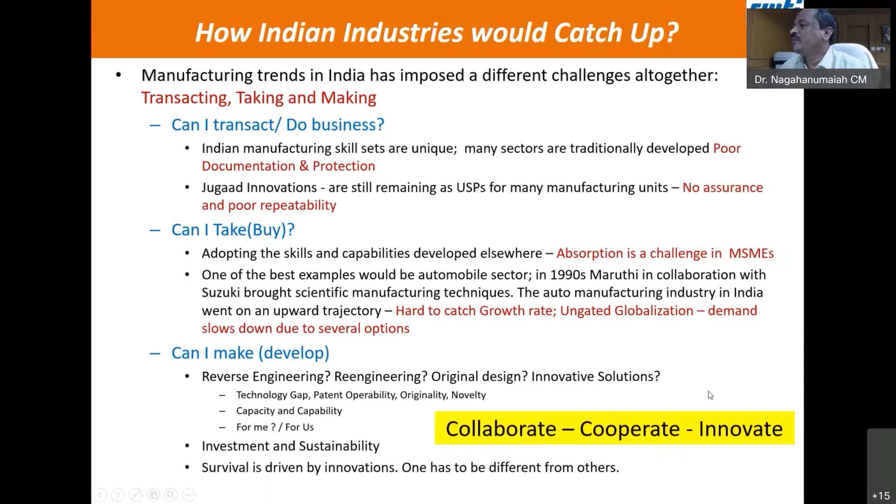So in order to survive, one has to be different from others. I think that is where innovation matters. My talk is primarily to convey my thoughts on how one could innovate, through collaboration and cooperation. We all know this model is very popular in business development - how innovation models are coming and each technology will be there - but our target is, can we transform India from the situation of 'made for India' to technology or products 'originated in India'? I think that is what brings Atmanirbhar, or sustainable India, in technology terms.

But while doing this, I think that is where we in the Indian system look at these 4 P's differently - not in an inclusive way. I think that is where we miss out. We need to look at the innovation process in an inclusive way that addresses all these 4 points: product, process, people, and production.

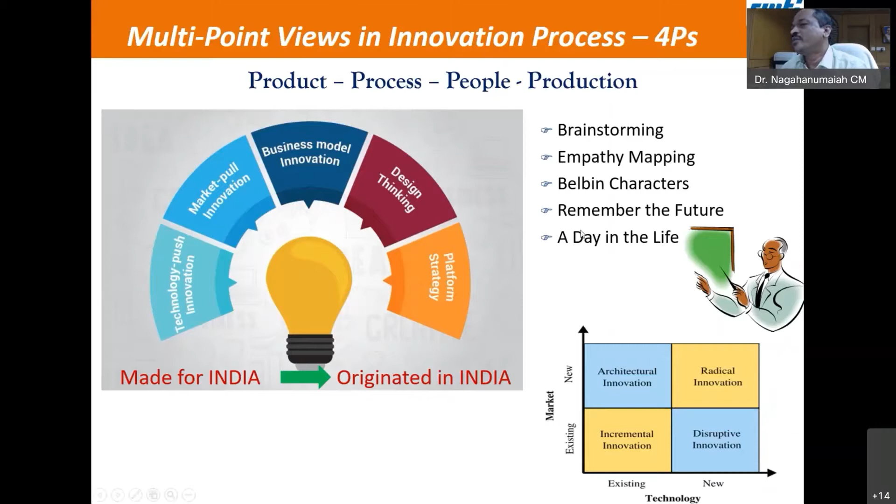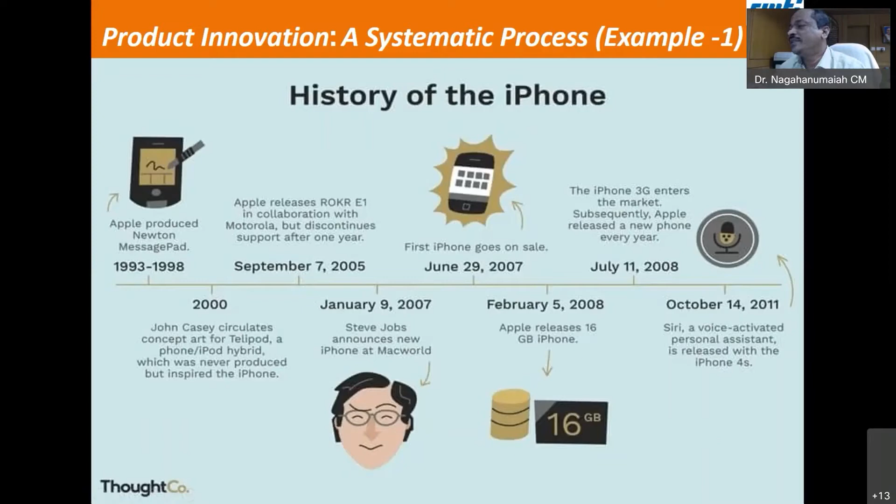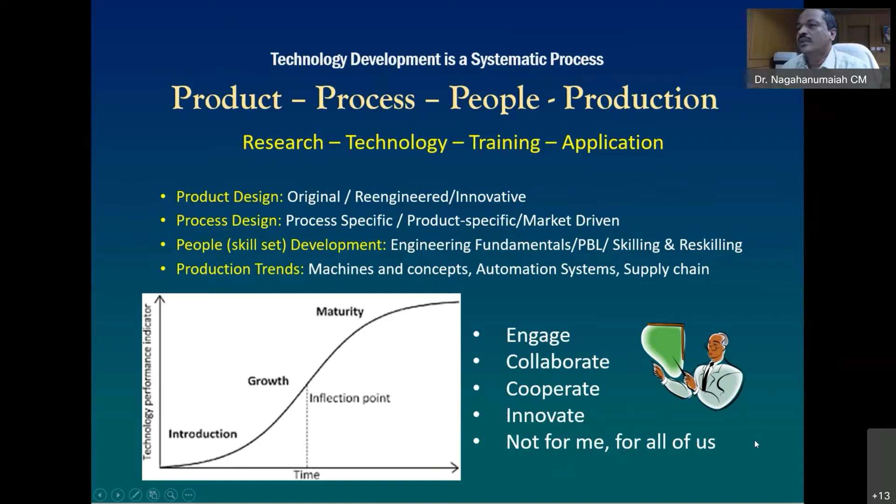Of course, countries like us should look at the technology or the innovation, not for me, it is for us. That is where basically inclusive innovation matters.

If you look at inclusive innovation for engineering multi-scale and multifunctional parts, that is the characteristic of the current innovation process, because products are becoming multifunctional and intelligent, and one has to operate at multiple scales. So these are the 3 research areas one has to look into apart from the design: the engineering of products, manufacturing processes, manufacturing equipment and machines, and manufacturing systems and factories.

So in order to do this effectively, in addition to the design aspect, inclusive innovation primarily advocates the involvement of the complete stakeholders. In simple terms, this I took from the public media: inclusive innovation is the means by which new goods and services are developed for and by those who have been excluded from the development mainstream.

So the basic idea is that innovation doesn't happen with only stakeholders, it is also the people who are otherwise not in the mainstream of the innovation system. If you can, details can be referred to by this. This is a good book, a good reference material.

As an objective, inclusive innovation seeks to provide sustainable solutions to those who would otherwise remain excluded from access to offers as a result of their social, economical or environmental context. As an activity and a business model, it reconciles the goals of commercial viability and sustainable societal development.

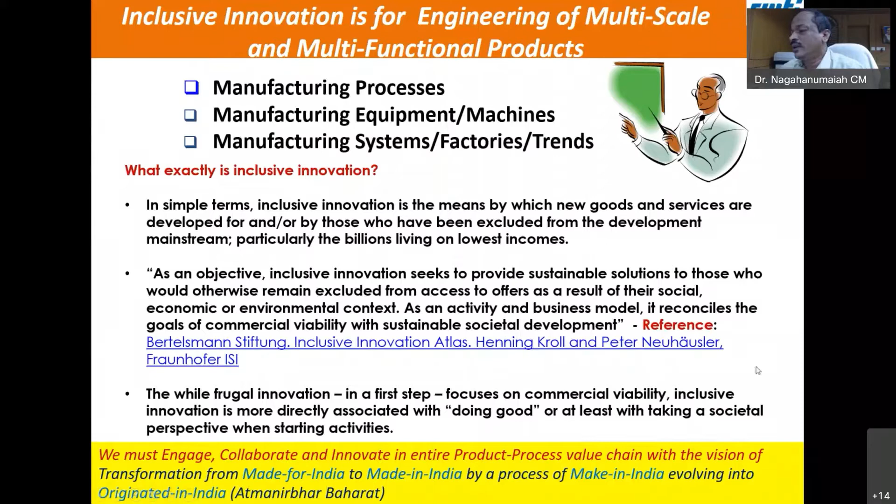I think this is where our target and our vision of our Honorable Prime Minister lies. So then, if you look at it, original product process innovations, I think we have not done good.

The reasons, of course, it is debatable. I will not get into the details, but as for me, I think these are some of the key elements that put us at the bottom in original product or process innovation.

One is, we always look at science and engineering and study as two isolated pillars, because after plus two, if someone's IQ is good, he clears JEE or whatever the common engineering entrance test and gets into engineering. Whoever could not, does science. And many times the one who joined science is already demotivated because of so many reasons.

Then in school education, we always know how to score 98 rather than 95. And there is no active and participatory learning, because our teaching is always curriculum driven. In so many cases, I'm not blaming anybody, but in many cases it's true.

The manufacturing is taught by a faculty who had never operated a lathe. I think there is no minimum requirement to become an engineering faculty. Today I'm a student, tomorrow I'm the faculty of an engineering school.

Then there's social obligation, no importance given to our own passion. So I become an engineer because my father wanted, or I become a doctor because my mother wanted. We rather think more of the comfort of the next generation, because how I eat, how I feed my son, how my son feeds my grandson. That is how we look at it.

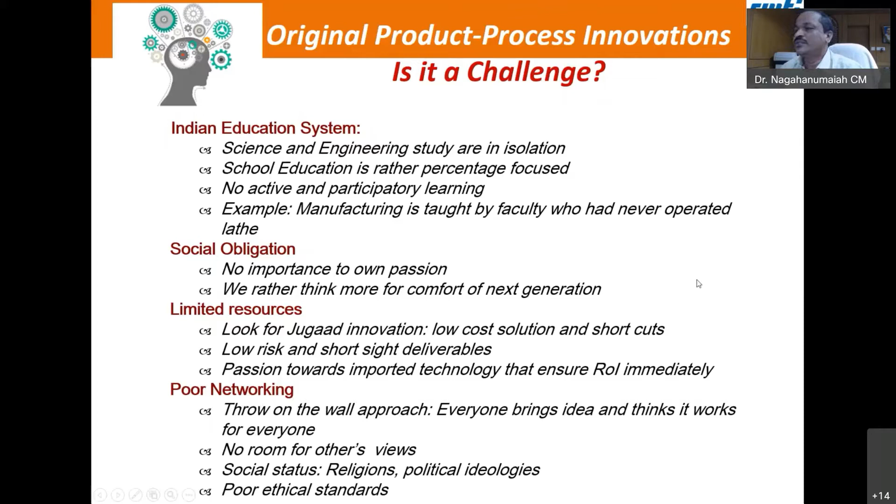Of course, limited resources lead to jugaad innovation. It is not wrong, but at the same time, it cannot be repeatable. Low risk and short sighted deliverables because of the limitation. And of course, this is very debatable, poor networking, because we all believe everything we say works, and there are no rooms for others' views and also other social challenges and issues.

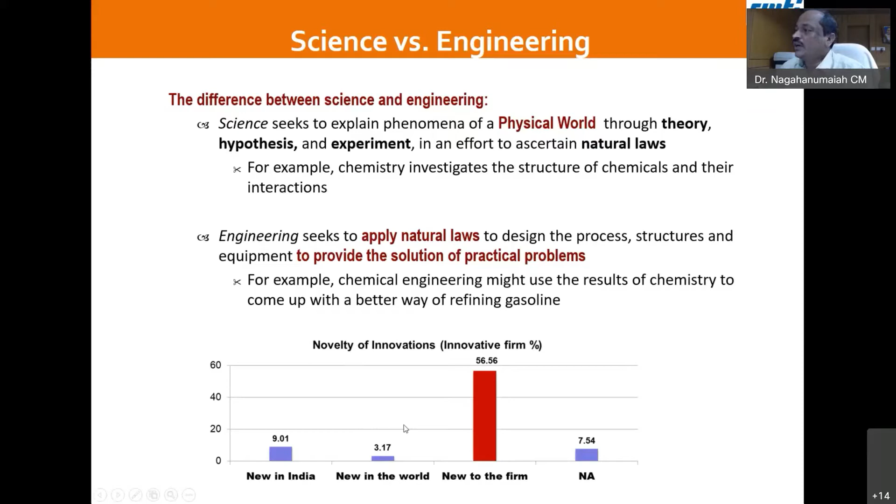If you look at the survey conducted in 2016 on industrial innovation in India, the majority is new to the firm. It covers 9,001 industries. It was done by the Ministry of Commerce, and the report is published by them. So it's about 60% new to the current firm, new to India is 9%, and new to the world is less than 3 to 5%. This is what the reality of innovation is, but innovation need not make an impact globally.

Then what are the roadmaps, the drivers? The roadmap is, I think there is no other option. One has to believe there are 4 stages. One has to do research, then take this research further. Many of them will not even reach this stage, to develop it as a technology.

That means process, capital, everything in the industrial attributes. Then you absorb, meaning you train, teach, and prepare, then you deploy, and then you realize the cost benefit, whatever the outcome delivery is. The drivers are, yes, I think this is where we Indians are now.

For some time, we are not given much importance. We always believe something made outside is good. It is always well known that you know how to do things with your hands.

You will be skillful. You are a more free and independent individual. You can depend on yourself and your community. You are well prepared. You can stand up to technical crashes and resolve them. I think COVID was one example. Many people had only a single supply chain, so many had to close their operations because of that kind of poor preparation.

You are more rooted in the real world. You are more confident. You realize that you don't need many of the luxuries. Now nobody looks at luxury, everybody looks at frugal engineering.

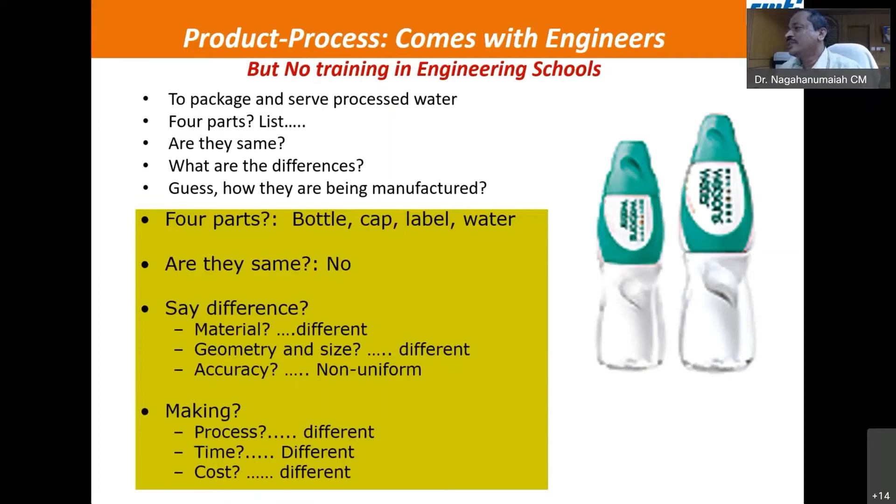So the situation is like this. You ask about the least count of the vernier caliper, and students will always say, I'm not blaming anybody, that the value of 1 MSD minus value of 1 ESD. But if you use the vernier caliper with a least count of plus or minus 0.02, and your inspector has written diameter 19.998 against the base drawing dimension of 20 mm, I think many students are not able to identify whether it is correct or not.

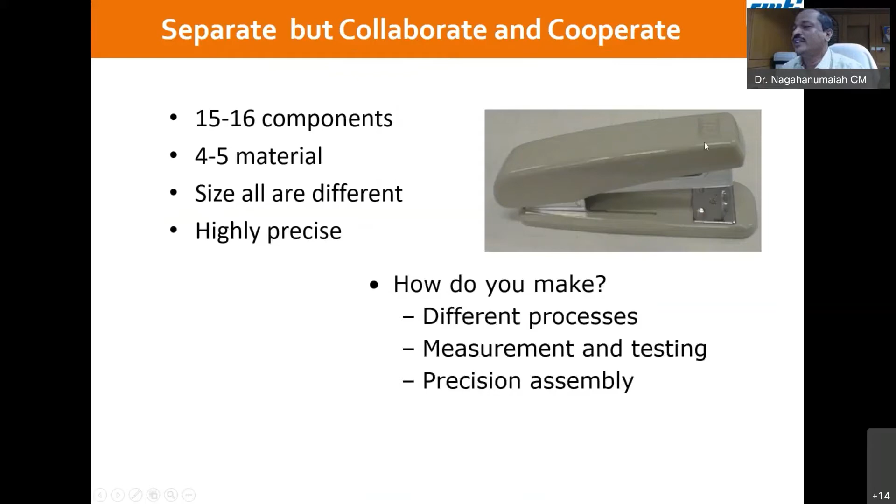I think that is the kind of challenge we have. Even look at us, how many of us realized, because I use a stapler every day, but even I did not realize when I was in engineering school, that this stapler has about 15 to 16 components of 4 to 5 materials. And even the dimension requirements to design this are in the order of precision, like few microns.

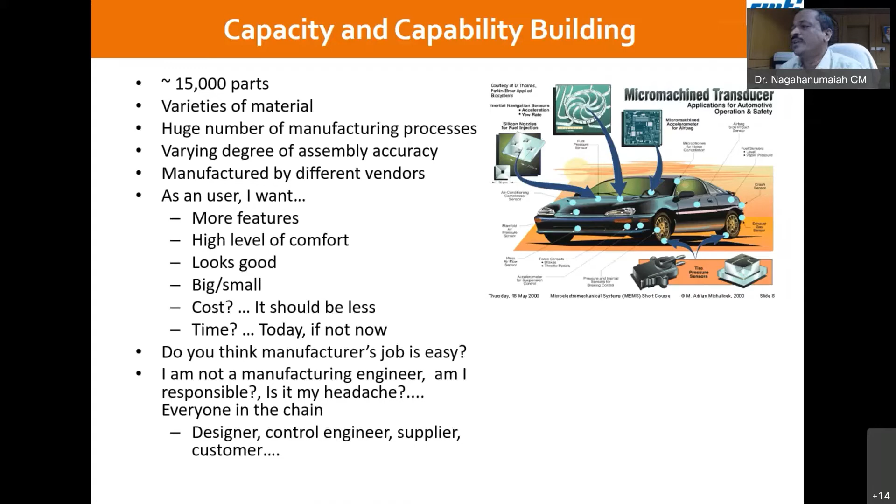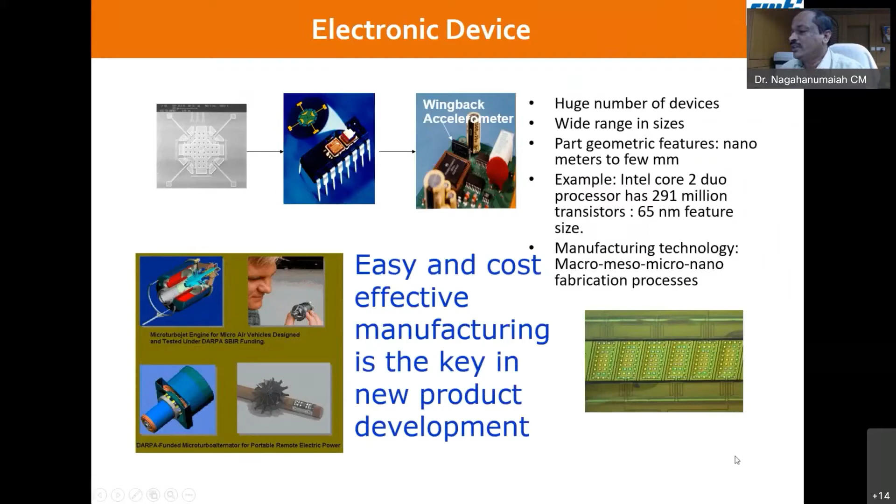Then look at the miniaturization that happened. This is like a micro turbine, turbojet engine, which could be held by hand. That's a kind of miniaturization. On the right side, this is a fluidic chip which could be used in biomedical analysis. Always for manufacturing, easy and cost-effective manufacturing is the key, no matter whether you make a water bottle or biomedical devices.

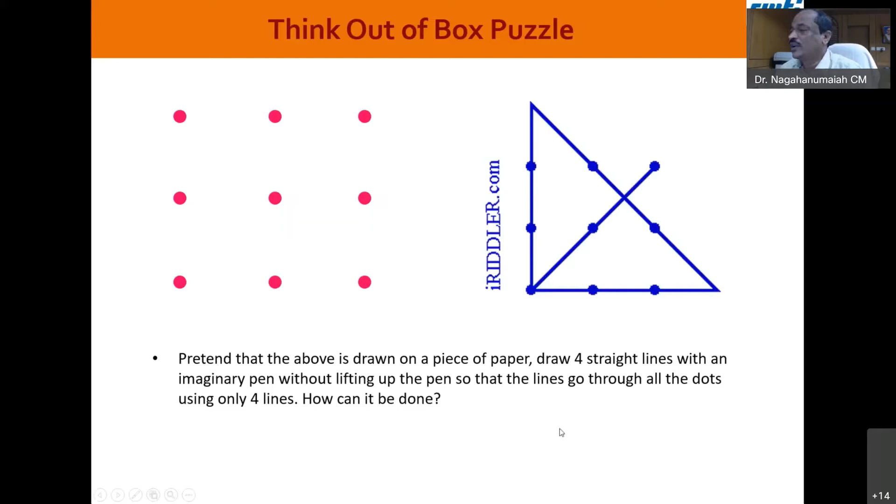Another issue is that we have 2 or 3 different verticals, you can say, where producers and employers have different perceptions regarding learning exercises. From academia or the school promoters' side, they always look at practical based learning as not what we have been doing for the last 20 years. And how can you do active learning in mathematics?

There is another kind of view, but researchers say, okay, that just won't work in engineering, but yes, we can't afford that attitude. On the other aspect, the industry aspect is retention, motivation, engagement, and learning. I think this may be the reason for this bad condition, which is sad.

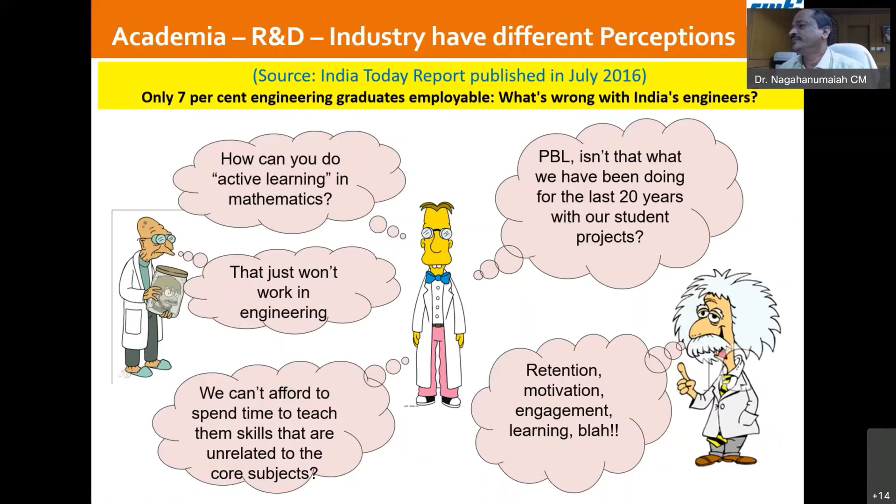In India Today, a report published in 2016 says only 7% of engineering graduates are employable. I think the question to be answered is, what is wrong with our Indian engineers?

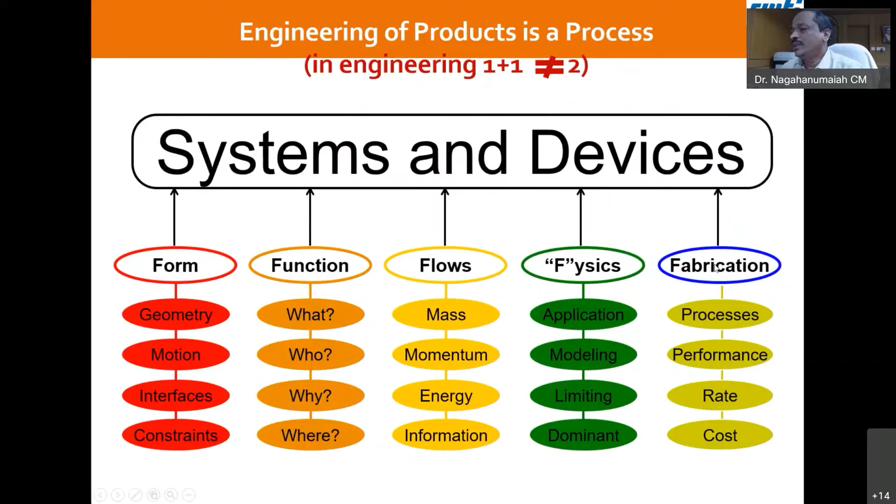Again, I think many of us have failed to recognize that in engineering, 1 + 1 will never be 2. It is always 2 plus dot something, or 2 minus dot something. That is because of these 5 F's: form, function, flow, physics, and fabrication. If an engineering student can recognize this importance, this is another example of how fundamentals are important.

Look at any manufacturing process, I have not seen any manufacturing process which doesn't fall under these 4 categories: either we remove material, or we shape the material with phase change or without phase change, or we add material through additive deposition, or we assemble atoms through self-assembly and self-organization, biomanufacturing and so on. There may be some variants or hybrids, but broadly, whatever manufacturing process we have today, no matter what you make, could be characterized this way. This is a clear indication that students have to be fundamentally clear.

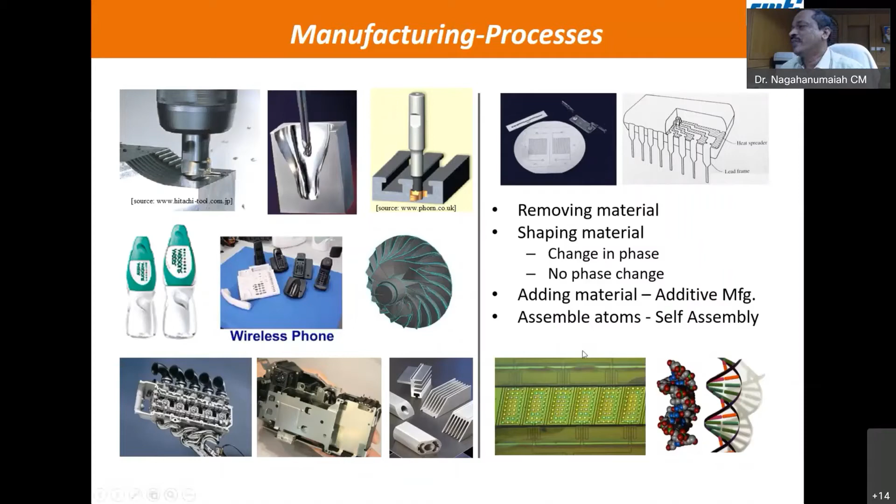Bringing real projects into a school is always difficult because, except for our IITs and IISc system, faculties have to teach courses designed by a curriculum and complete the syllabus as per that curriculum. A survey says students' attention span is only 10 to 15 minutes in a class of 45 to 60 minutes.

I think that is where the challenge lies for the faculty. If we can bring the stories of real problems into the classroom, and any faculty can increase that 10-15 minutes to 35 minutes, I think that is the best faculty, no matter what technique he uses. I believe: I hear and I forget, I see and I remember, I do and I understand.

I think in engineering schools these days, many institutions have compromised on practical-based learning. We need to bring those things back into the engineering curriculum.

Second is technological innovation. I've taken food research as an example because it's easy to correlate. These are the driving forces: food should be healthy and nutritious, better efficiency in food production, environmental and political impact, and the reality versus perception gap. There are a few more details.

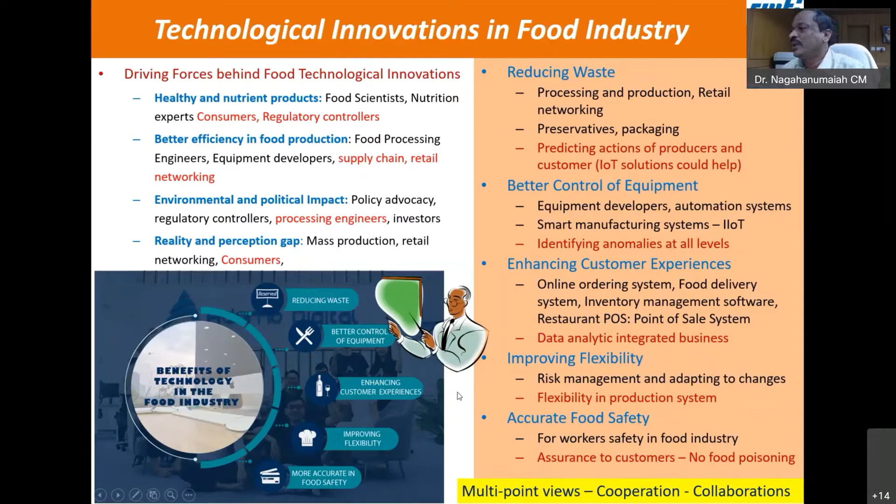This is one example where I was involved - CMTI. When I was doing micro-nanoscale EDM, I set two objectives. Micro EDM is a slow process - is there any way we can increase the productivity?

Second, since micro EDM is used for ultra-precision or micro-nano system devices, use of lubricant - the dielectric fluid - is always an issue. So the question was whether I could make micro EDM a clean process. Having identified this, we identified all these challenges.

As a researcher, along with my colleagues and students, we studied some of this and even tried to build a prototype. Building the prototype itself revealed different challenges when looking at micro-nanoscale EDM machine development.

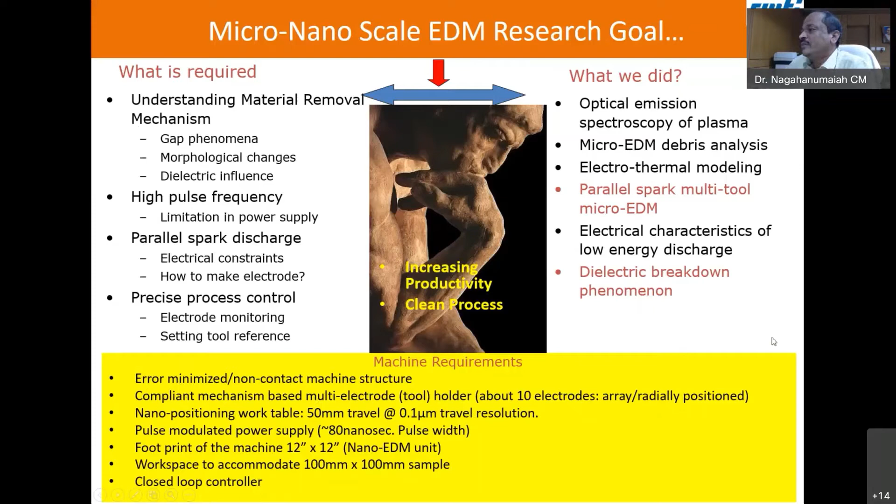I think that is where inclusion is required - people have to look at it as a total solution, addressing all these 4P challenges. This is my own slide.

I'm also looking for any suggestions here - this is just a slide I came up with about a month back. Reinventing research, innovation, entrepreneurship, and growth for customized product manufacturing. Here I took interventions - development of Indian technologies, technologies and products for optimized outcome-based innovation by addressing the 4P challenge.

Here I propose a DISC-based approach. This means: Data to design - that should address mass customization, localization, novelty, and frugal design.

Then Innovation to inclusion - that is connect and commit, inquire and investigate, design and development, implement and iterate. Then Cooperate to collaborate - that is all-in-one, teach, train, skill, rejuvenate, because we Indians easily get frustrated. And then you normalize - particularly with respect to IPR - it's not for me, it is for us.

Then Scalability to sustainability - that includes capital, machines, automation, knowledge harvesting, productivity enhancement, modularity, and flexibility. I think that is where I propose this kind of DISC approach.

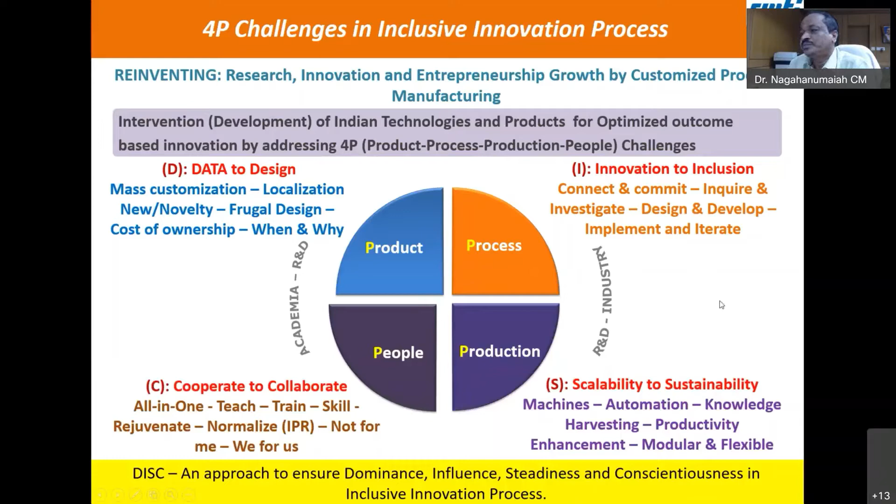So this approach aims to ensure dominance, influence, steadiness, and conscientiousness in the inclusive innovation process. That would bring about a situation like this.

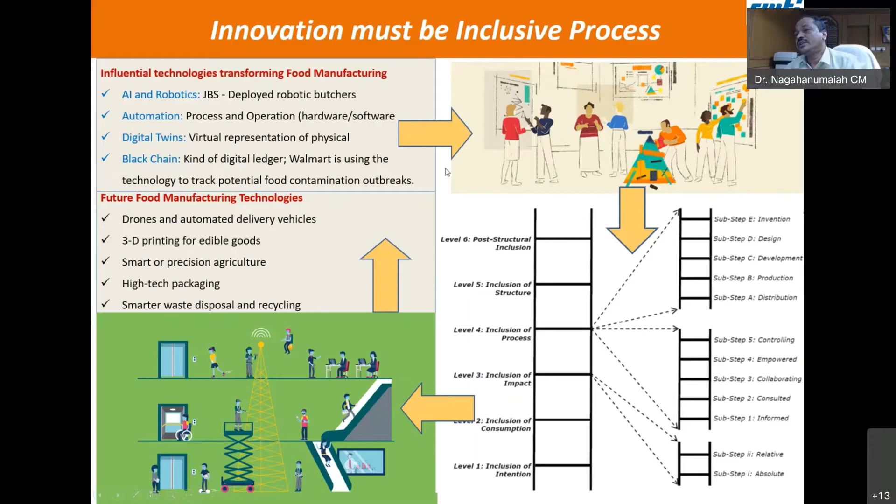Of course, this is already textbook material - there are different levels of inclusion: inclusion of intention, inclusion of consumption, inclusion of impact, up to post-structural inclusions - to create this kind of environment in the innovation system to realize challenges like technologies for transformation. I think this now becomes a tool or means to realize technological self-reliance, no matter whether it is in India or elsewhere.

So having this background, this is something I thought I'd share. Now we try to do this, even at CMTI we are also trying to bring in this culture. CMTI primarily focuses on manufacturing process development, equipment development, and systems for factories related to manufacturing.

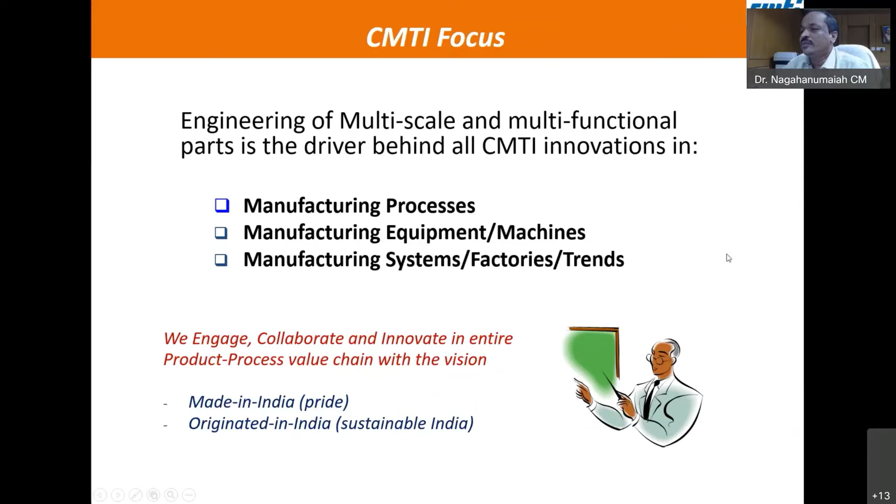Whatever we do at CMTI is at least new to India, so Made in India is our kind of pride. Of course, I can't say CMTI has developed technology new to the world, but whatever we have done is new to India. Currently we work to address four verticals: research, develop technology and machines, train manpower, and deploy into industrial applications.

In our chosen areas related to manufacturing: ultra precision machine tools, where we design machines and develop process technology capable of creating features of a few microns. Then special purpose machines, where for any process we build a machine. These range from tabletop to larger machines. The largest machine CMTI built has about a 12.8 meter footprint.

Then sensors and controls, since these are essential components of the machine tool. Textile machinery, we are into rapier looms. We already developed a 450 rapier loom, and now we are developing a 550 rapier loom. This falls under the special purpose category.

Our next vertical is aerospace, because sitting in Bangalore, which is an aerospace hub, we work with all the aerospace giants. Particularly, our USP is design and development of test rigs and developing process protocols. We design test rigs as required for testing of LRUs, and now we've also started on pumps, aircraft, airworthy pumps for various applications.

Then micro nano manufacturing and precision metrology is another vertical where we offer a lot of services to industry. My current manufacturing capability can produce features as small as about 8 nanometers, which I think is a unique manufacturing facility, especially over metals. Then smart manufacturing and Industry 4.0, we have another center primarily focused on smart machines and intelligent manufacturing processes.

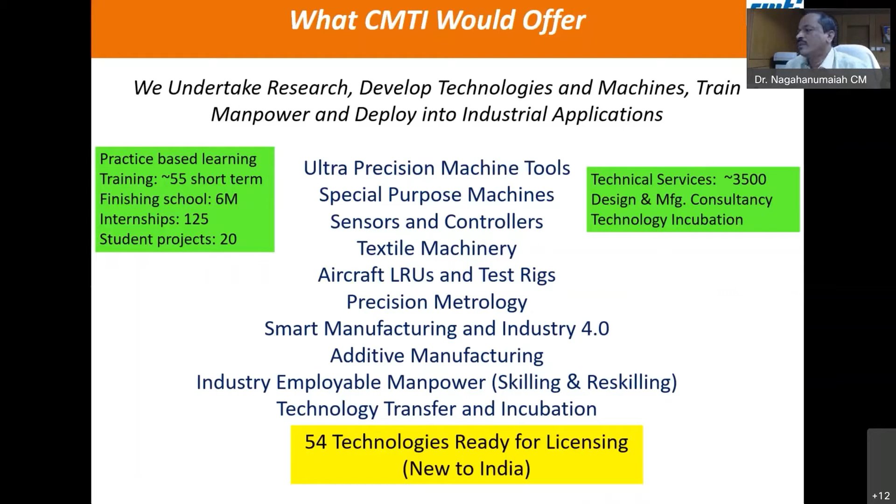Then we offer services to industry in all our areas, with about 3,500 customers. We also offer design and manufacturing consultancy, and technology incubation. For this, right now we have 54 technologies which are new to India today. All these 54 technologies are CMTI technology and are still not commercially manufactured in India.

Unlike other institutes, here we call our units centers, meaning they are all delivery-based focus centers. We restructured recently, about 3 years back. Each center has a design engineer, manufacturing engineer, materials engineer, controls engineer, and electronics engineer. That's how we structured this, with each group having a different focus.

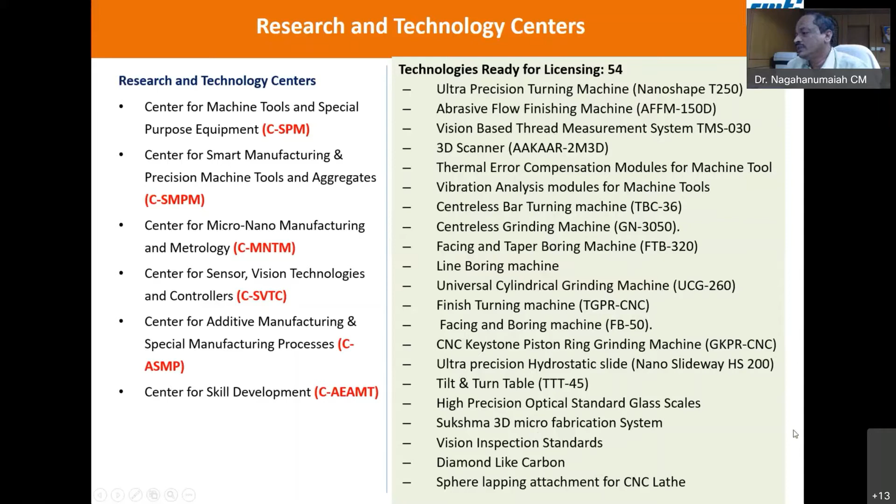So these are a sample list out of the 54 technologies. These are all machines which we developed and are ready for licensing. These are the services we offer related to machine tools and aggregates, measurement and calibration. As far as dimension metrology is concerned, CMTI is number one in India.

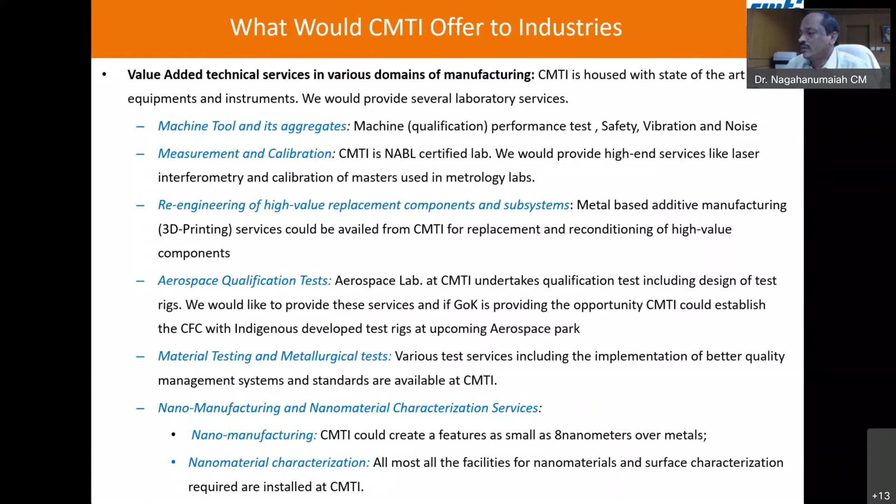Then re-engineering of high value replacement components, aerospace qualification testing, material testing and metallurgy, and nano manufacturing as I mentioned, where 8 nanometers is the smallest feature size we can make. And for material characterization, I think we have all the advanced tools: TEM, ellipsometry, Raman spectra, a range of microscopes, and nano indenters.

When we build a machine, that's another aspect in CMTI. We won't just buy subsystems and integrate them, because building advanced machines that way is always risky due to limited supplies. So what we look at is, when we develop a technology or machine, we also develop the aggregates. That means a company licensing from CMTI doesn't need to worry about someone stopping the supply, because the supply chain is also ensured - you can either make it yourself or build an ancillary to supply it.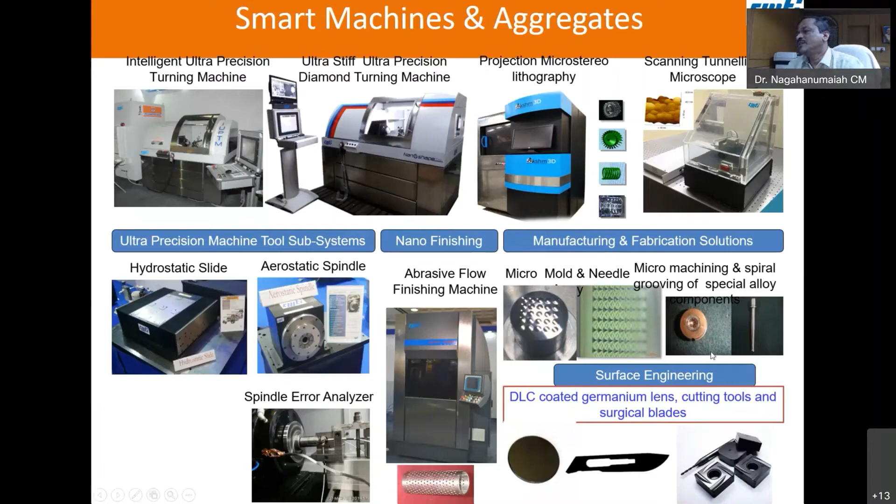Similarly, these are all SPM category - big machines we supplied, including the parallel kinematic machine we developed, and several subsystems like inspection gauging systems. And here it is, a test rig for pumps.

Look at this vertical planetary mixer - we already supplied 22 machines to various strategic sector agencies in India. This is for mixing solid propellant. We have supplied up to 4.5 ton, to be precise. Now we are building 2 machines of 10 ton capacity - that is global standard. We are building these 2 machines for ISRO.

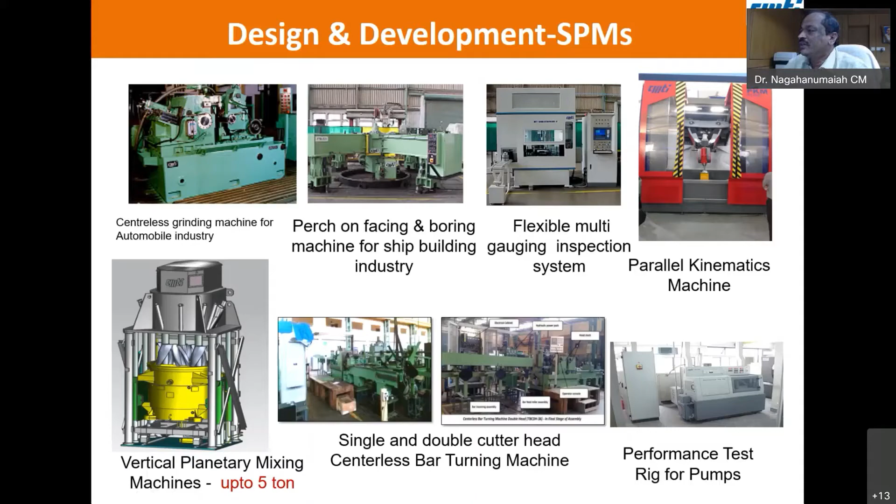This picture shows a range of machines, all developed in one financial year, just in the SPM category. In 2020-21, all these machines were supplied. In CMTI, in one year we build about 10 to 12 machines that we deliver.

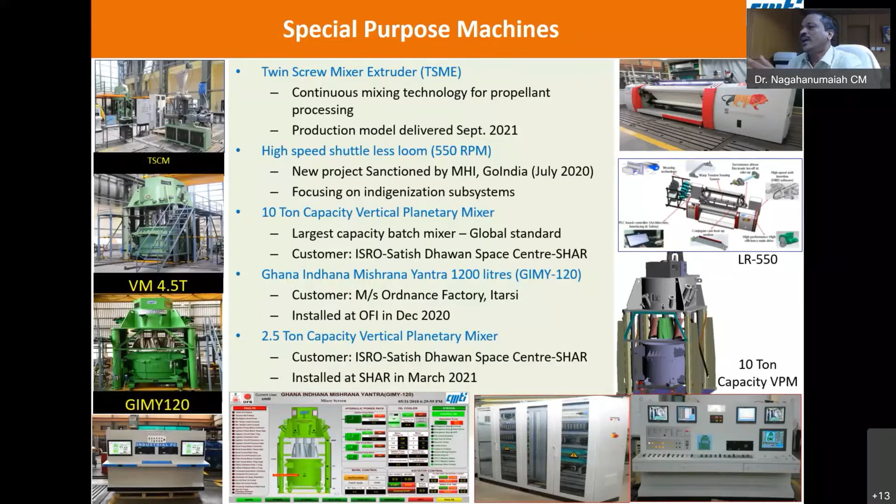We had 3,500 customers for whom we were offering services, apart from our own R&D technology development - these are longer time projects.

We also have the Nano Manufacturing Technology Center, a dedicated center with an underground lab, 13 feet down, focused on all these areas.

You can look at these labs - we have a clean room lab, class 100 to 10,000, with 16 clean room labs in total.

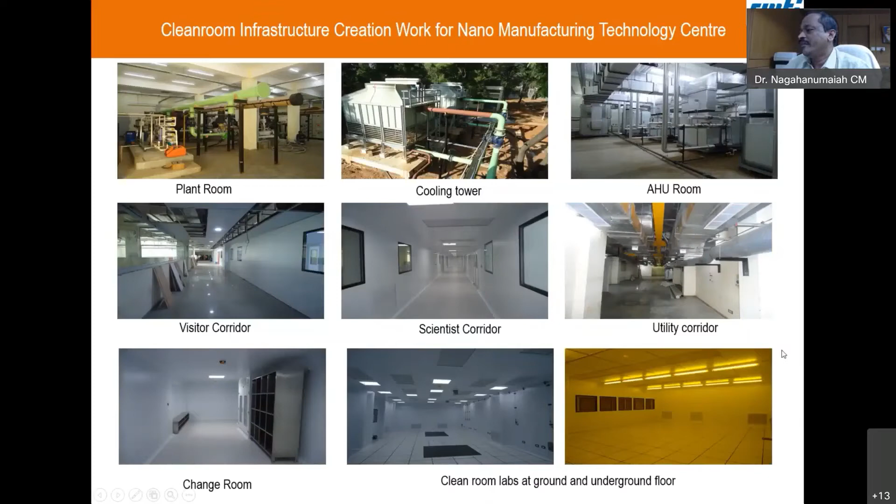And you can look at the underground metrology lab, where we do calibration of master gauges. These are the line inspection metrology labs. So from production, you can bring a sample from industry, and we give the measurement service.

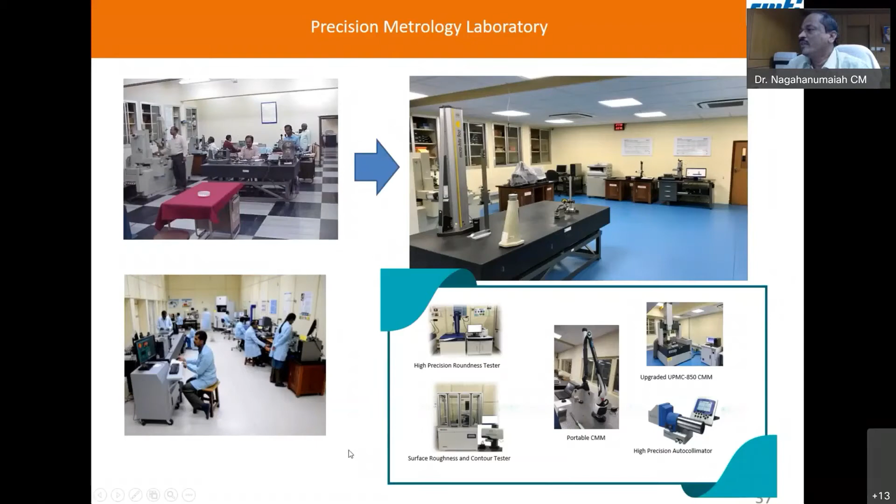This underground lab was established in the 90s, about 6 feet down, and we have a full range of tools. So as far as dimension metrology is concerned, I think we are maybe number one in South Asia.

After that, our technology is now given to Ace Designers, who is a well-known CNC machine manufacturer in India. And look at all these subsystems that we have developed as well.

This is a finished kind of component which can produce optical surfaces with surface finish RA value of 2 nanometers and form accuracy of 0.2 micron. These are other specifications, meaning this machine is not just assembled, it is built from first principles.

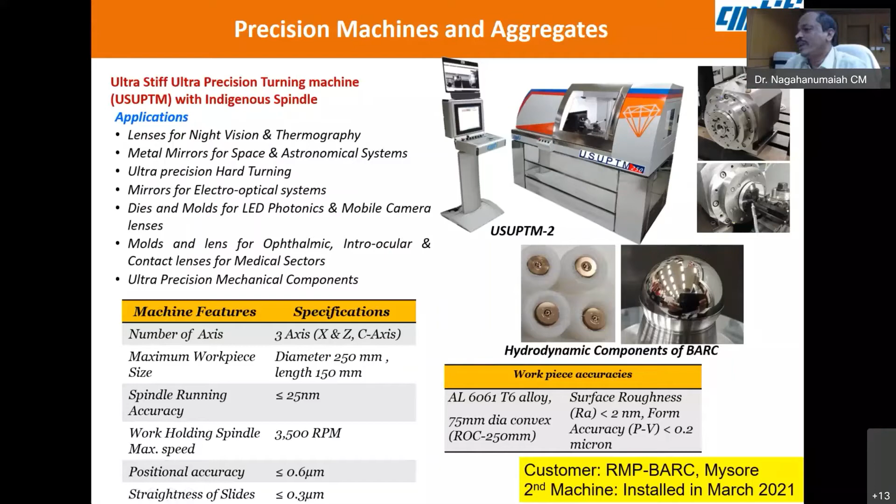That means even the testing itself - the testing of this machine - has a separate protocol which we developed ourselves. And for such developments, of course, we get recognition.

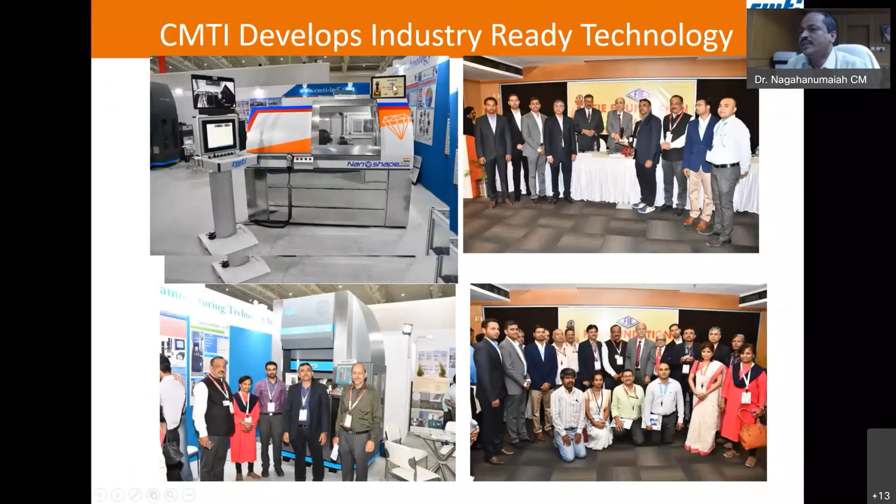At the last IMTEX, we got the industry-ready technology award, the FIE award, which has been awarded for the last 40 years. Look at this - even for other customers like Amrita Institution, we have developed a table, an air bearing rotary stage for some other instruments. That means CMTI can also build aggregates alone for customized requirements.

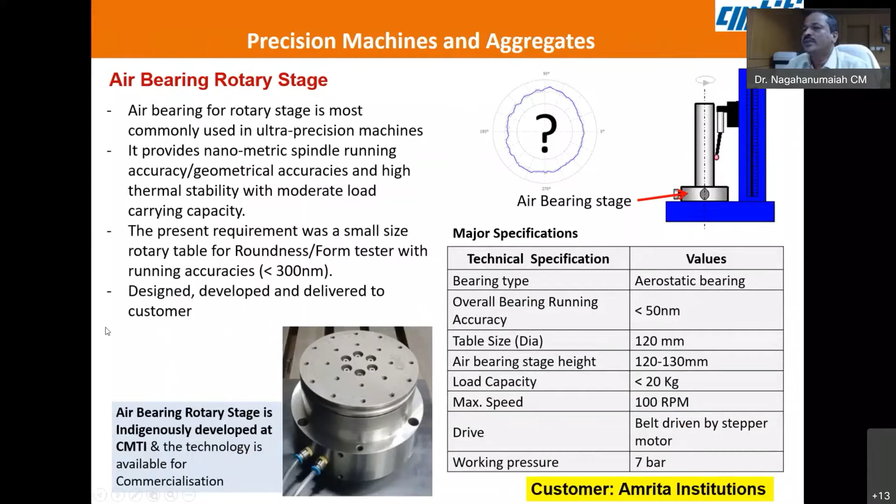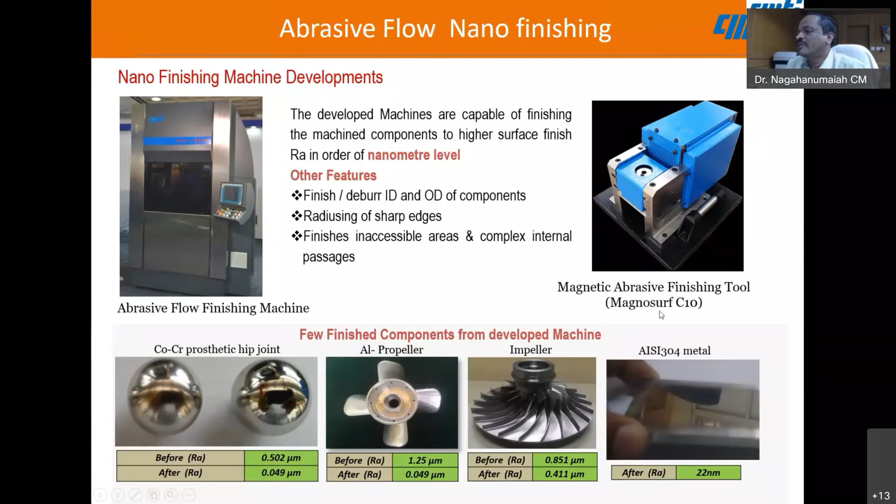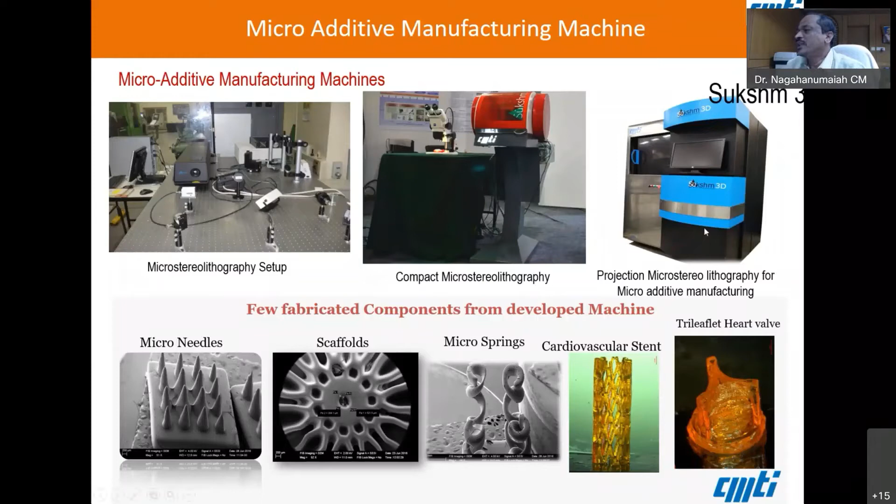If you import this machine from a foreign supplier, it would cost you 1.2 crore, but our machine's academia price is 32 lakhs, and industry price is 37 lakhs.

So then, Industry 4.0 - yes, we are into Industry 4.0. It's just to make aware, Industry 4.0 is nothing new. It is not even a technology. It is only a concept.

The idea is to understand what you are doing based on the data collected from the resource, digitize it and share it to the respective analytics, who do the analytics and come up with predictions or a plan for action. Then take it back to the resources and automate either decision making or the manufacturing system, such that your productivity enhances, breakdown reduces, rejection reduces, so that one can become competitive in the market - that is, you become innovative, responsive, cost effective. That is how I look at it.

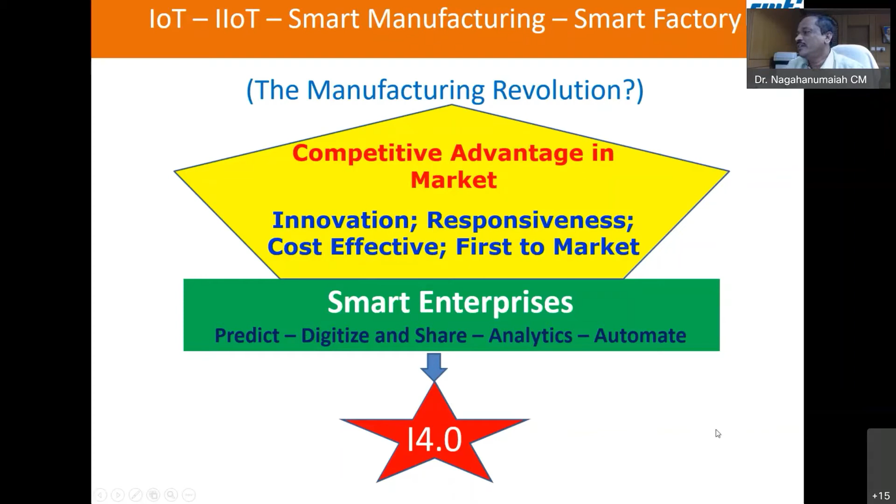Otherwise, Industry 4.0 was already there in industry, but it all depended on so-called Banerjee or Mukherjee in the company. I think that dependency has gone because of technology evolutions, and of course technology happened in the electronics industry, which also facilitates data sharing across the community - that is distributed manufacturing.

We also build multifunctional smart machines in all respects. That is our diamond turning machine, which already has 8 sensor modules and even self-compensation algorithms, ANN based algorithms built into the system. Then there's process intelligence, which I think is where not much work is done, and academic institutions also get into this.

Because many solution providers today, even global service providers, are not there - the reason is smart manufacturing or Industry 4.0 could be implemented from cake manufacturing to flight manufacturing, but it needs to be customized. You need developed, customized, mission-specific, product-specific technology.

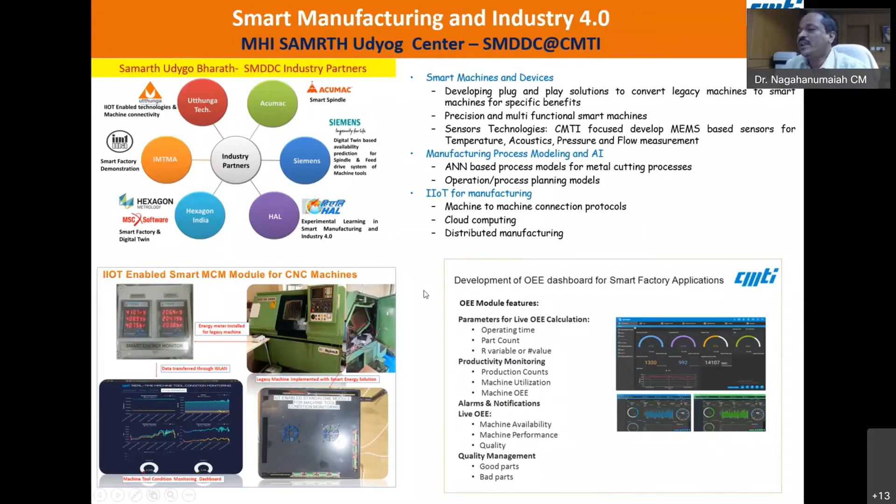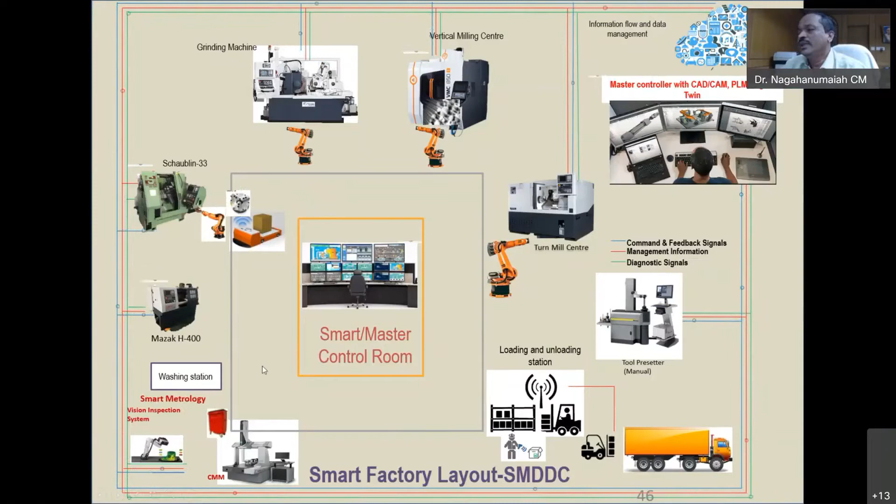This is the controller room, and this is the design room. The first floor is a design house. At the bottom, we have a control IIoT control server room, and you can operate everything from there - all AGVs, everything is housed. We have not made this only a demo cell - this is going to be a production factory. We want to use it for our regular manufacturing purpose.

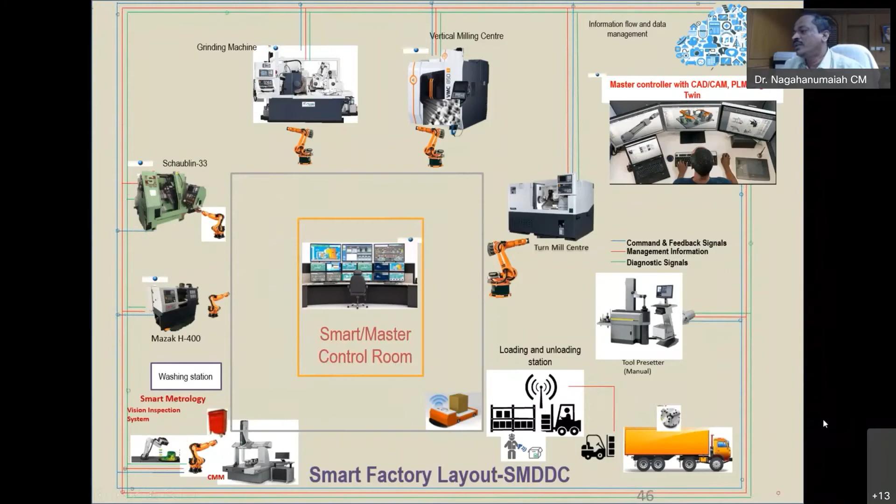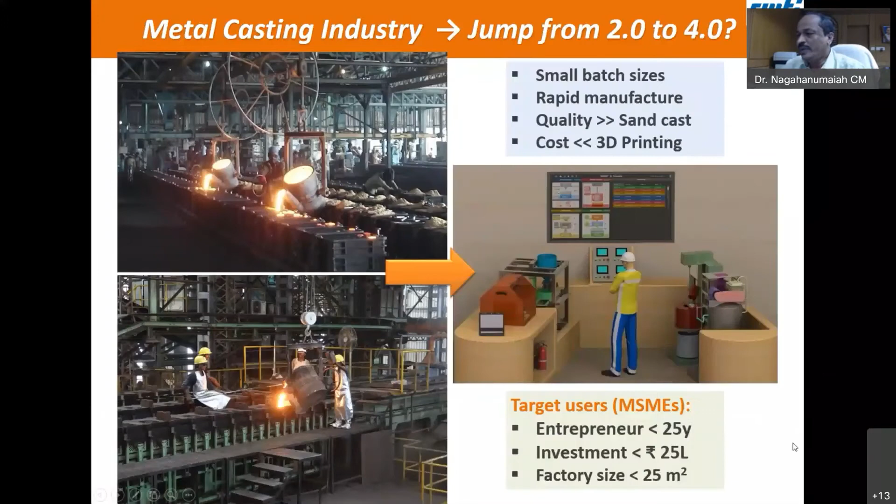It covers everything from design to process, sensing and monitoring. We developed software for designing, built hardware machines, and integrated them with the sensor network, data acquisition and all. Then we stream the data to the server installed at CMTI. We also made the IIoT platform called Smart Foundry platform for visualization, evaluation, and defect analysis.

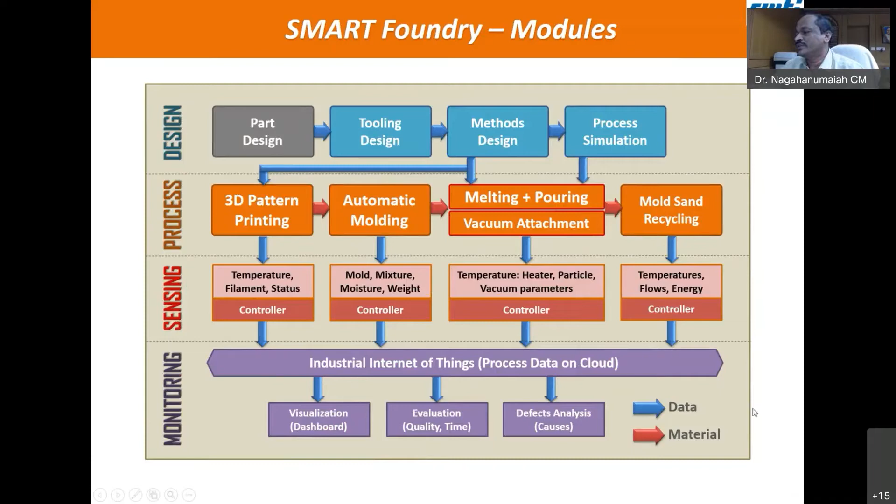This was, of course, in a bit more detail. This IIoT integration part was done by CMTI, that's why I showed this. Hardware is done by different people, and the edge controller and demonstration integration IIoT was done by CMTI. So now, when we demonstrated to DST, they got a little excited and asked why we don't make this an industry-ready product.

I think that is coming up as version 2, which is now ready for demonstration. I'm sorry, it's end of August now because of Corona delays, but it will be there for another month. Those visiting IMTEX should be able to see our Smart Foundry demonstration.

It has a footprint of 16 feet by 8 feet, which can produce castings starting from CAD data. You can do the analysis, print the 3D printing pattern, and then it automatically goes inside for molding, pouring, and then comes out.

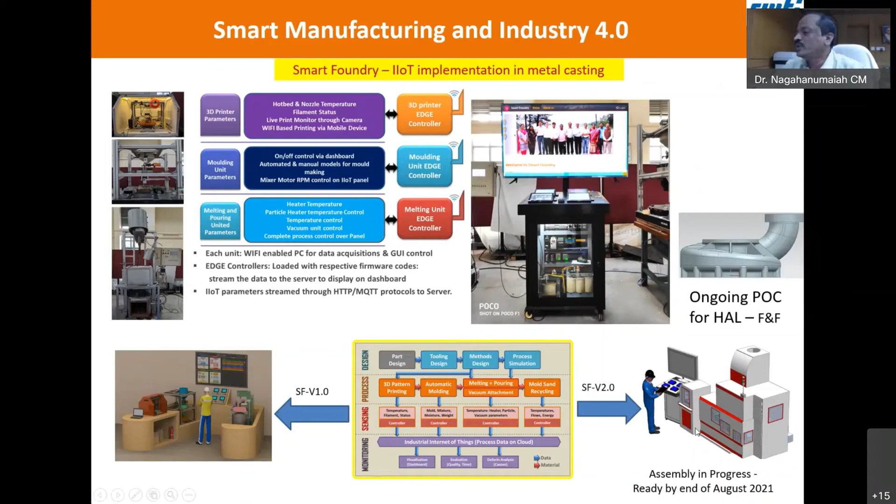This is the casting we have done. This pattern is made out of 3D printing developed by College of Engineering Pune. This is a sand mold, 3-part mold, made using an automatic molding machine made by CMERI Durgapur. Then molding, melting, pouring and all is done by 2-3 people, including from a private college.

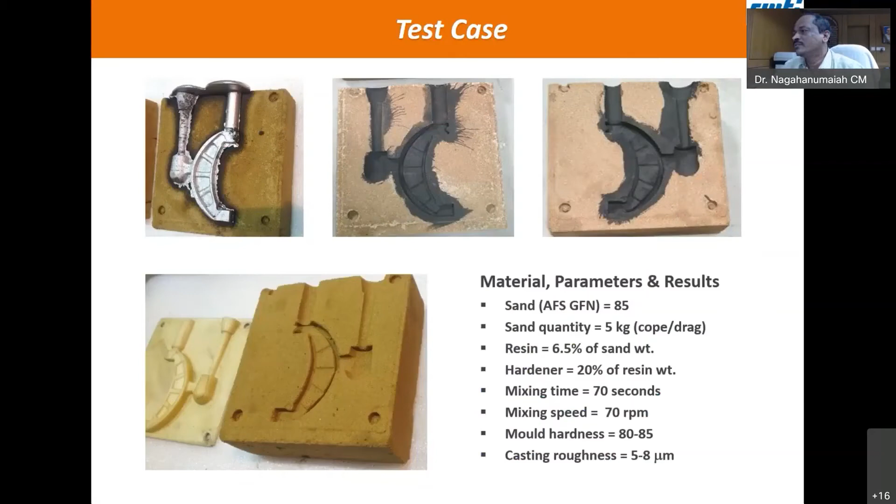For time purposes we haven't shown the other aspects, but data can be streamed and then you can do the analytics there.

This is about additive manufacturing. This parallel kinematic machine-based structure we are using now was developed by us, and now we are converting this into an additive manufacturing machine with a certain build volume. All subsystems, the powder feeder and nozzle, we are developing ourselves. Otherwise, CMTI has been in metal additive manufacturing for a long time. I think CMTI was the first to introduce a metal additive DMLS machine, and now we also have a DMD machine.

We provide a range of services. This is one sample service which I showed: rehabilitation of an aircraft kind of pump gear shaft.

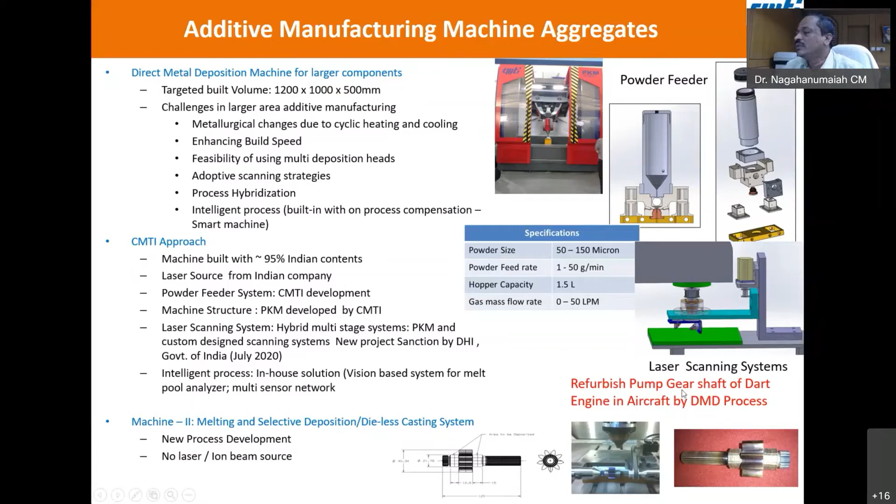We also have a sensor lab, particularly a MEMS fab facility. We have all the facilities. This is a relatively new facility, including characterization and packaging systems.

Some of these were our products, just 2.5 years old now. We have built some sensors, a thermal error compensation module for a high-speed grinding machine of Kennametal, which we already transferred technology for, and now a Mac Power vertical machining center, where we are transferring technology. This machine is there now and will be demonstrated in IMTEX at our CMTI stall.

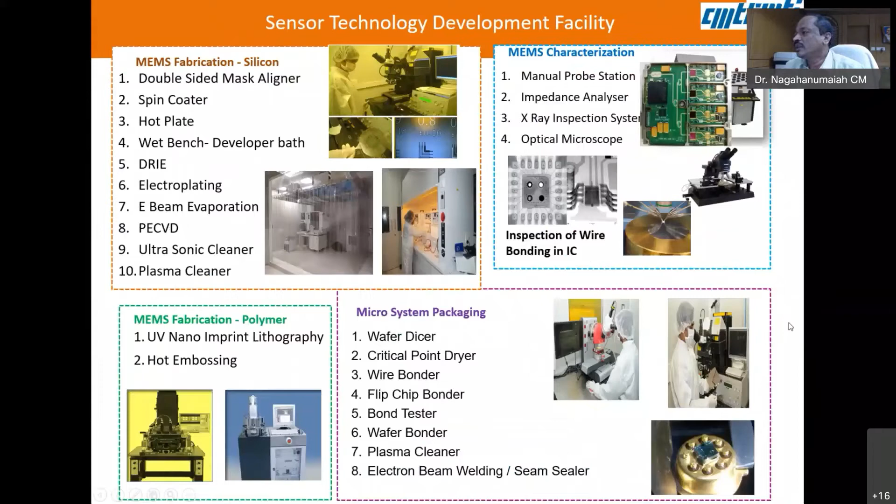We also do packaging solutions. The total solution I mentioned here covers fab, characterization, and packaging, with complete lab facilities, and these are a few of the first kind of products that came out of this vertical.

This is again in the same space. There is another high-speed rapier loom, for which we are developing microprocessor controls, and we also provide manufacturing solutions for dedicated manufacturing. This is one vision-based solution we developed for Lakshmi Machine Works, installed in March 2021.

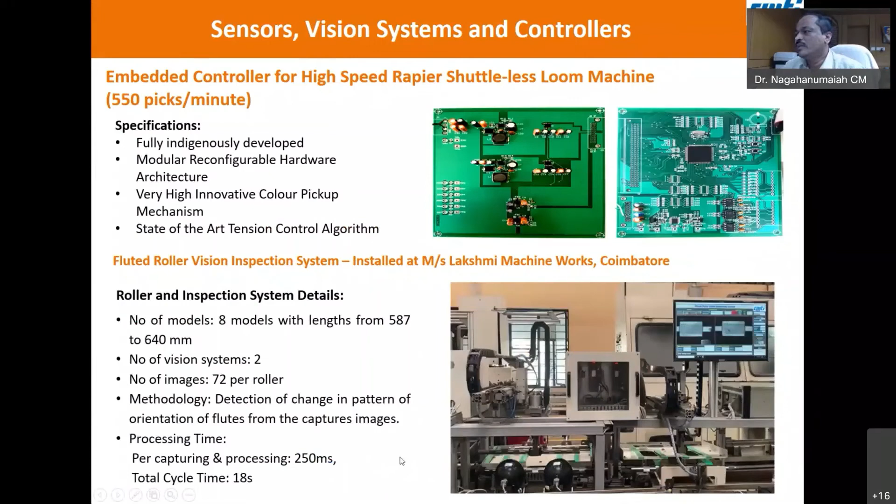Who are making textile, and we also built a 3D scanning system. This is a white handheld scanner, laser-based handheld scanner. This will be ready for technology transfer in another 2-3 months. We have developed our own scanner which could capture up to 30 micron features.

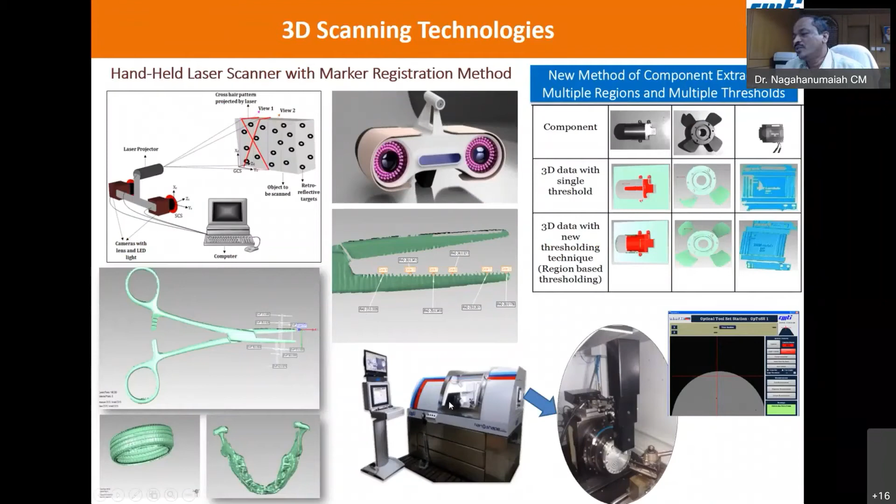It can be used for measurement purposes as well as reverse engineering purposes. And also vision-based solutions we developed for tool positioning for this diamond turning machine.

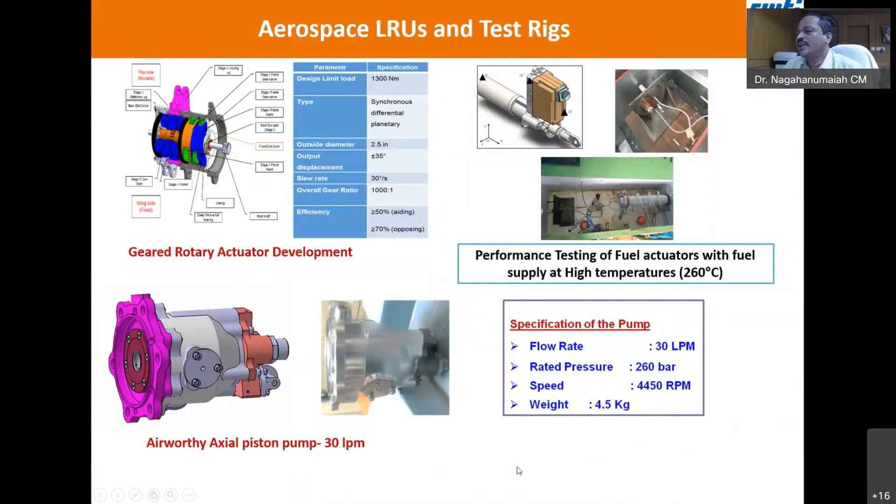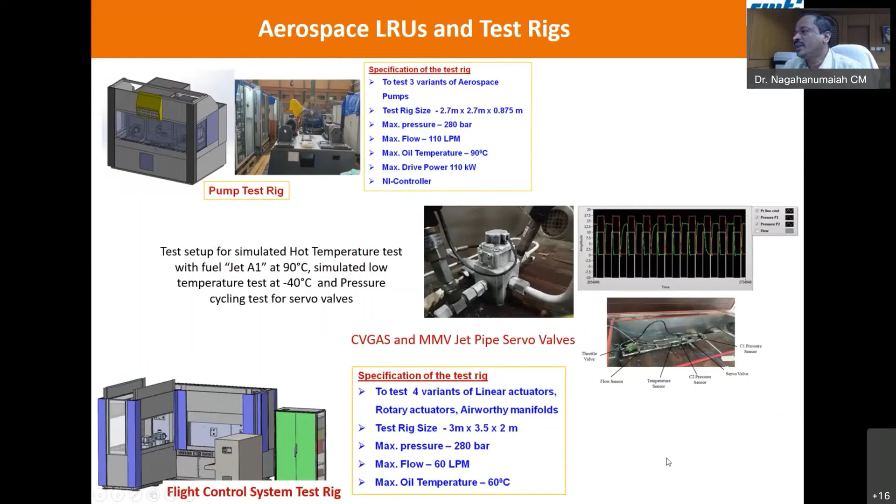In aerospace, just to show samples, that is gear actuator, rotary actuator, and airworthy pumps, and some test rigs. These are all like test rigs - flight pump test rig, flight control system test rig, and some other servo valves. We are good in both pneumatics and hydraulics based system development.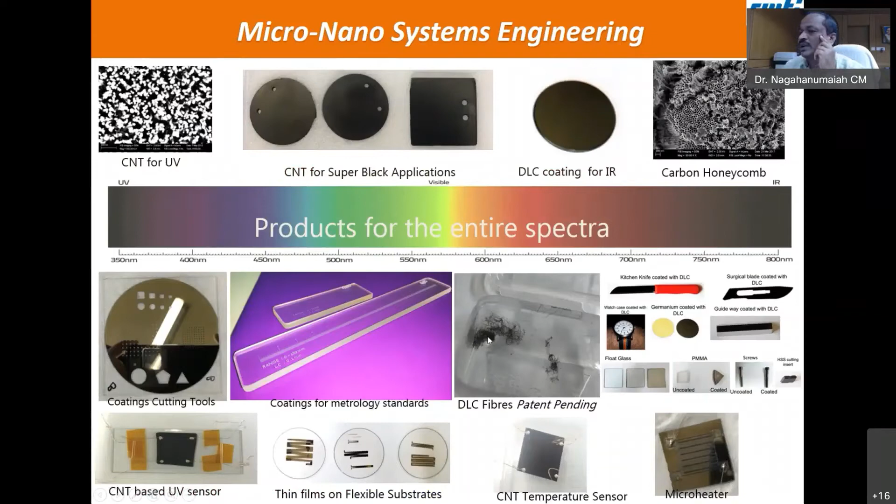And then we have provided a range of services, but I think I have multiple slides, so I will skip here. I will show one or two.

We provide services to industry, particularly for precision components which are not possible in industry or small scale industry. So this component is a fuel ductor - this is an aero engine component. The component looks very small, very simple, but manufacturing it is a challenge.

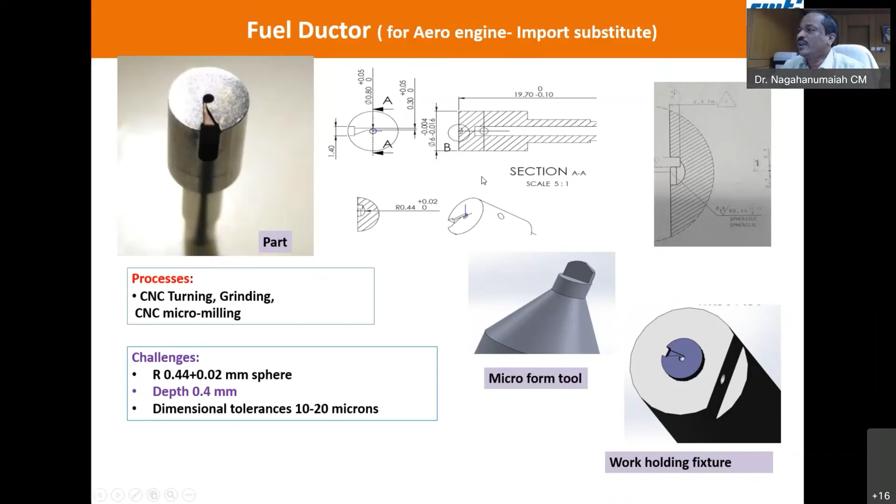So we need to make a kind of microforming tool, and these are one-off requirements. Solutions are also what we provide. What we do is, if it's a small order, we machine it and supply. And if it's a larger order, we build a machine and supply, including establishing a process and all. They give a drawing and it seems easy to make, but it's not that easy.

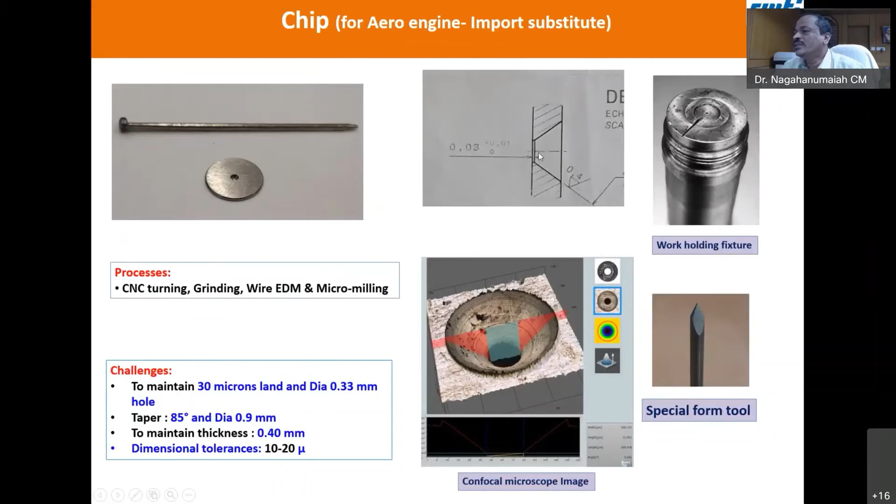You look at this - you have to make 30 microns parallel, with some accuracy. I think that is the kind of requirement that comes. So we do it. Here you can also look at, when we're building some machines, we build an attachment for their machine and then finish it off. That is the kind of service also we provide.

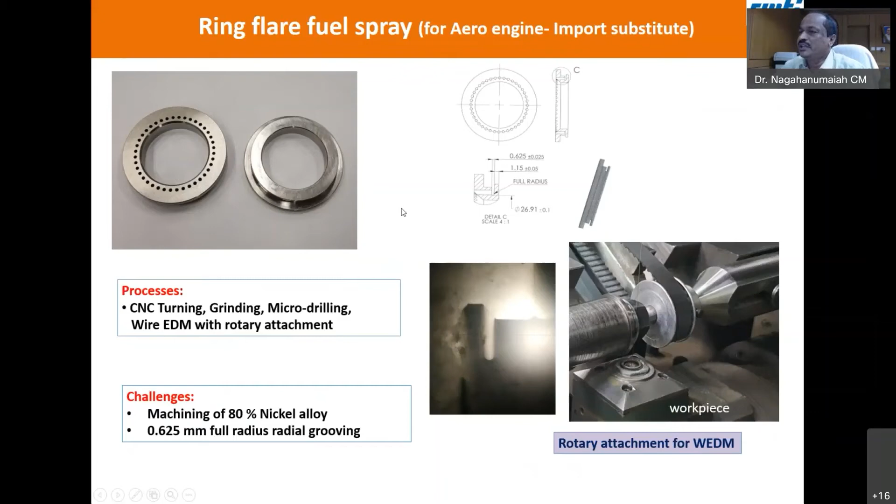I think this was done for CMERI. One of our colleagues in CMERI was looking for an anti-friction bearing pad. So we explored all these methods. Finally it worked - micro punching. We made so many textures of size like 400 by 400 microns.

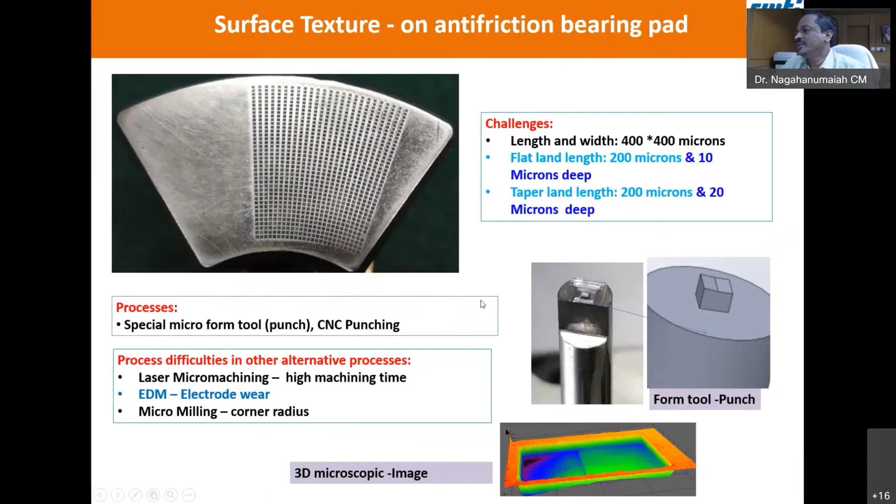We don't have any standard machine for this. These are all one-off requirements, and we machined and supplied it to them. That kind of service we do.

So like this is a micro needle - we supply to IISc a 10 by 10 array of 10 micron needles. These are all machined out.

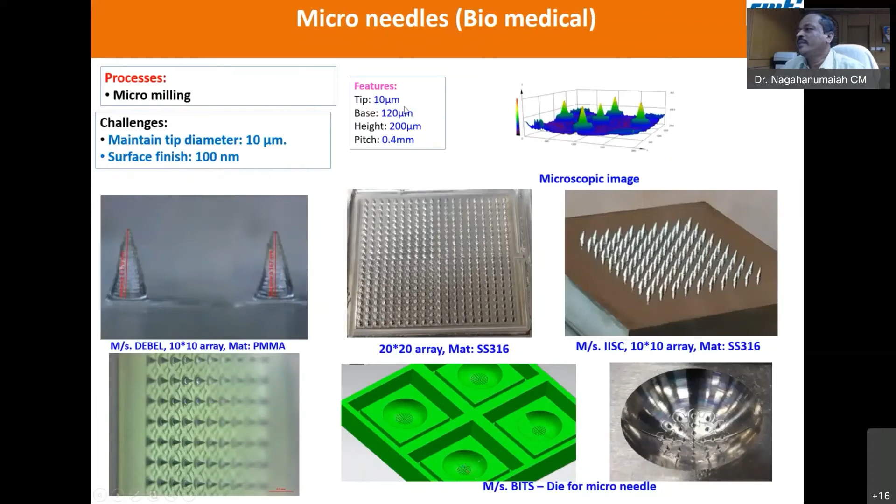And this is for NAL - I think we supplied a complete assembly, precision assembly. This was as an example.

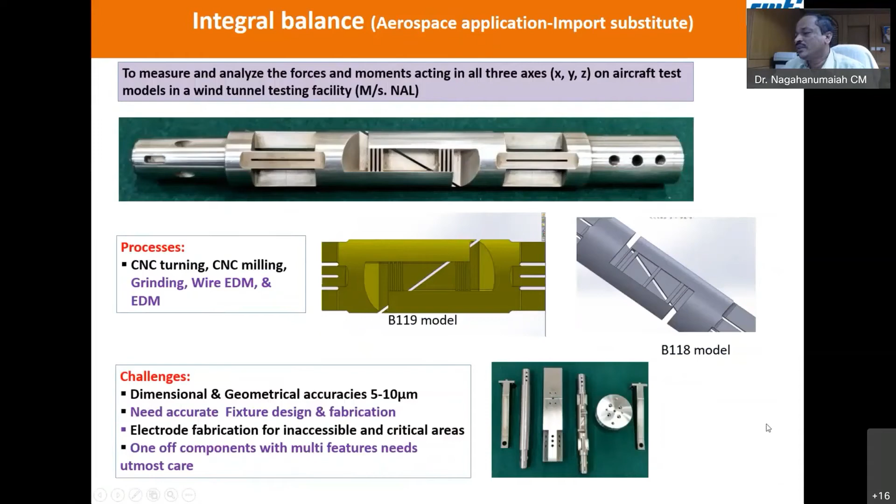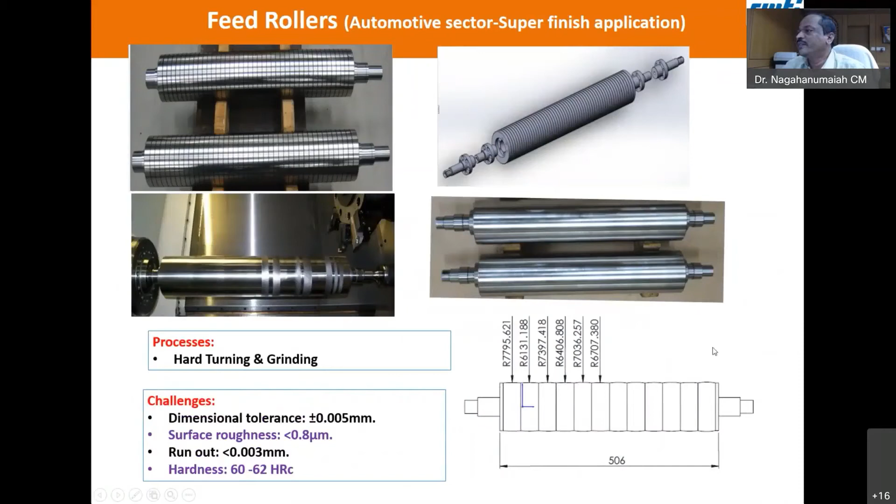And it's like, we also do that - these are rollers. I think this is a regular order we have. We supplied feed rollers, doing the grinding operation and profile grinding. This is like a concave shape. You can look at the radius - the accuracy requirement is 5 micron tolerance.

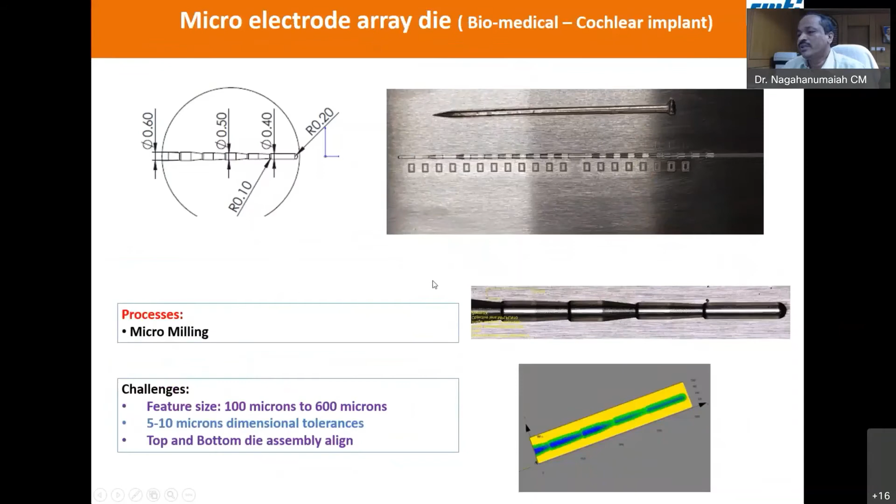And some small precision micro parts we do - like micro texturing, primarily on metals. Ultra precision level accuracy is required, and some fixtures are required. We design, establish the process, design the fixture and supply to them, or we build a machine for them.

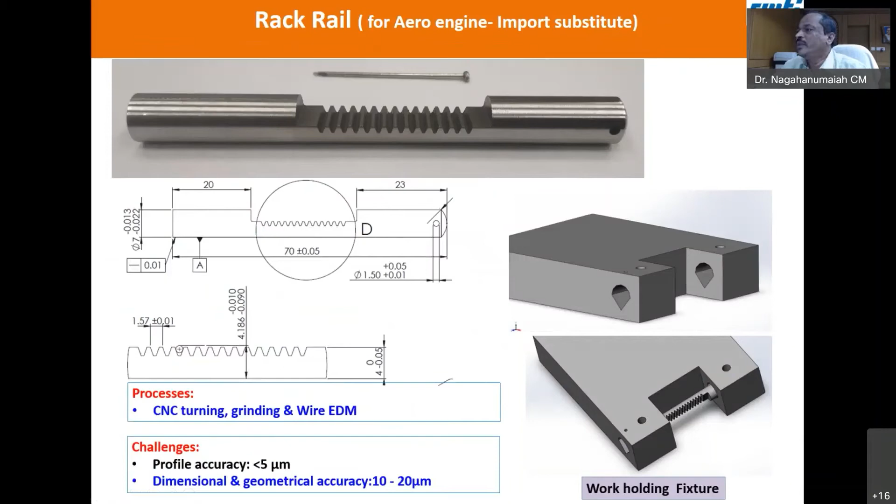Of course these are the challenges - there are still many challenges. If any drawing is given like this, with accuracy requirements in dimensions of microns, there is no standard manufacturing process. I think that is where the manufacturing challenge lies.

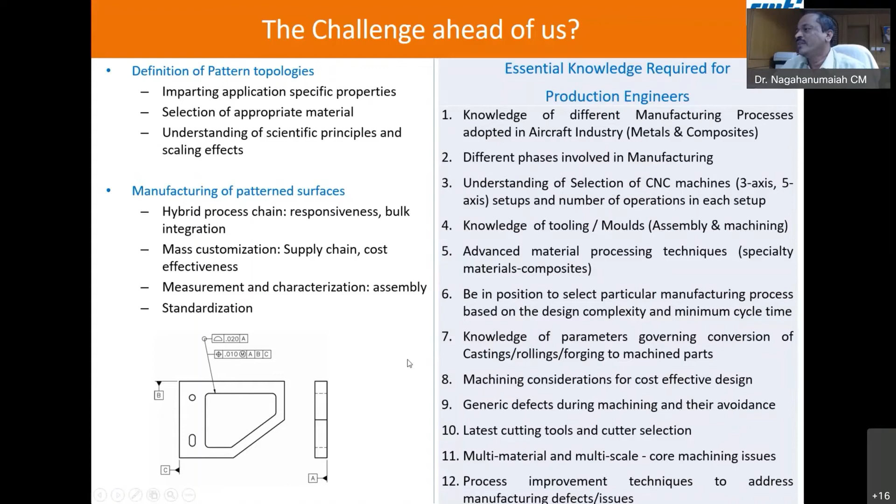And if any student community is there, this is for you - if you want to be a production engineer coming out of engineering, your employability will go up if you have this kind of expertise. I think this is where one has to focus. Many of our students don't have this capability - they can't even identify what 3 axis, 3.5 axis, or 5 axis means. Even the definition of 5 axis itself is difficult for many students.

Otherwise, two directors can sign an MOU, keep the MOU copy on the shelf, but teams have to join and work together. In order to do that, our ministry has come up with a program called the Open Innovation Platforms. There are 6 such platforms promoted: IIT Madras called KITE, ARAI called Technovus, ICAT called Aspire, BHEL called Spandan, HMT has another, and ours is called Drishti.

This platform allows problem owners, problem solvers, and supporting enablers to join together and find a solution to a problem. As of now, we have about 4,000 users, mostly students. Industries can host a problem, reach out to these innovators, and evaluate the concept to get it done. CMTI only facilitates this, and CMTI facility is to be utilized, and CMTI will also become an enabler and technology solution provider.

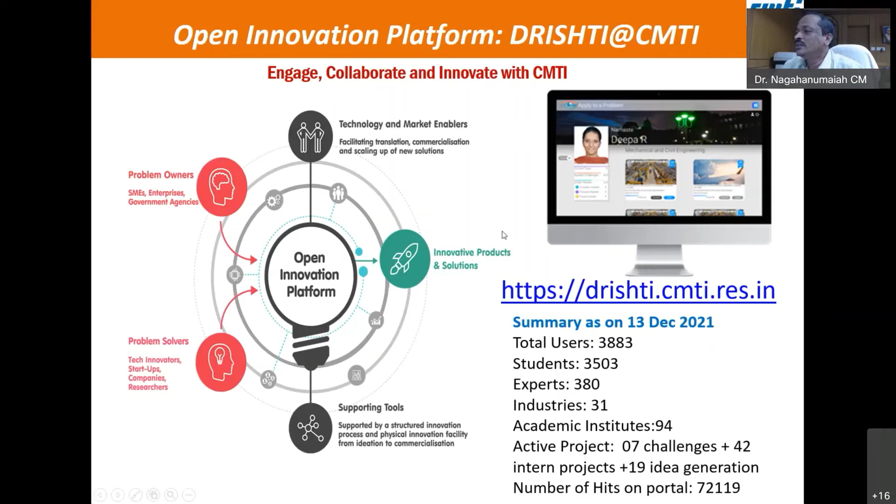I request all of you to register for this. Right now, 7 challenges are open. These are challenges hosted even by big companies like L&T, but we don't have a solution provider yet, so the dates are all extended. I think this is where there are opportunities for students to do practice-based learning.

This scheme allows 20% investment from the company or industry, and 80% assistance will be provided. It is a kind of de-risking of technology development within the country. I think this is a more appropriate scheme, so we can discuss it with you.

Now, Azadi Ka Amrit Mahotsav week celebration, we do starting from 10th January. We are looking for your participation on various stages, like as a speaker, as an expert, and even just to attend and hear what kind of things are happening on different topics. Details will be available on this portal shortly.